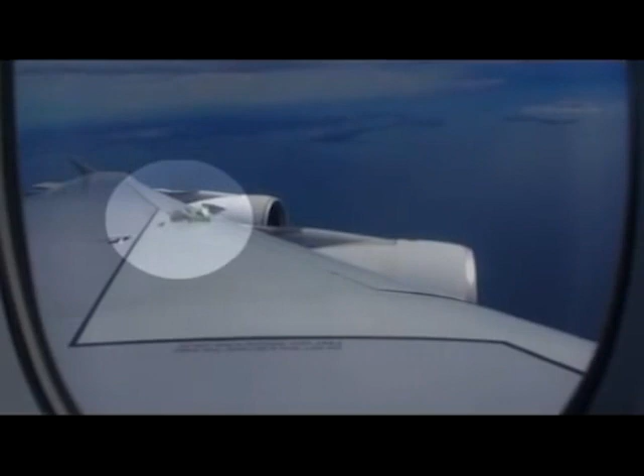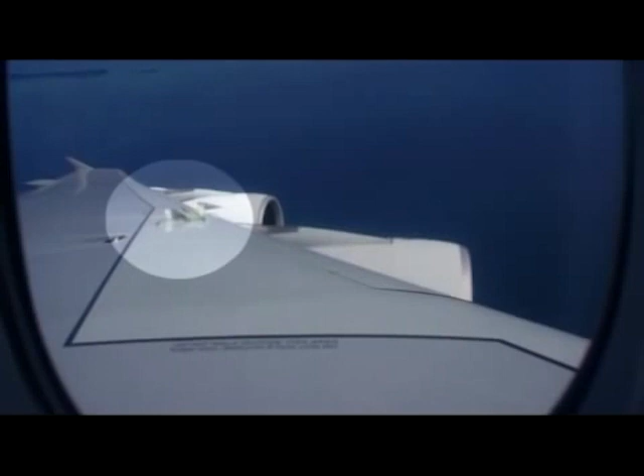Apologies. I'm sure you are aware we have a technical issue with our number 2 engine. We have dealt with the situation at the moment. The aircraft is secure at this stage. We're going to have to hold for some time whilst we lighten our load by dumping some fuel and a number of checklists we have to perform. But as I'm sure you are aware, we're not proceeding to Sydney at this stage. We're making our left turn now to track back towards Singapore. As we progress with this, we'll keep you informed. At this stage, everything is secure. The aircraft is flying safely, and we'll get back to you very shortly with further information. Thank you for your patience.

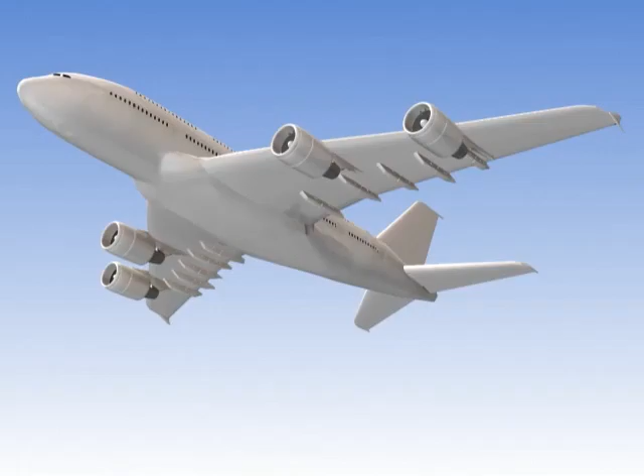On November 4th, 2010, Qantas Flight 32, an Airbus 380 with 440 passengers, 5 flight crew, and 24 cabin crew, departed Changi Airport, Singapore, on a scheduled flight to Sydney, Australia. About 4 minutes after takeoff, while the aircraft was climbing through 7,000 feet over Batam Island, Indonesia, the flight crew heard 2 bangs. A number of warnings and cautions were displayed on the Electronic Centralized Aircraft Monitor, or ECAM.

Initially, the ECAM displayed a message warning of turbine overheat in the number 2 engine. The crew was cleared by ATC to conduct a holding pattern to the east of Changi Airport. While in the holding pattern, the flight crew worked through the procedures relevant to the messages displayed by the ECAM. The aircraft had sustained significant impact damage to the left wing by fragments and debris from the uncontained engine rotor failure, and fuel was leaking from the damaged left wing fuel tanks.

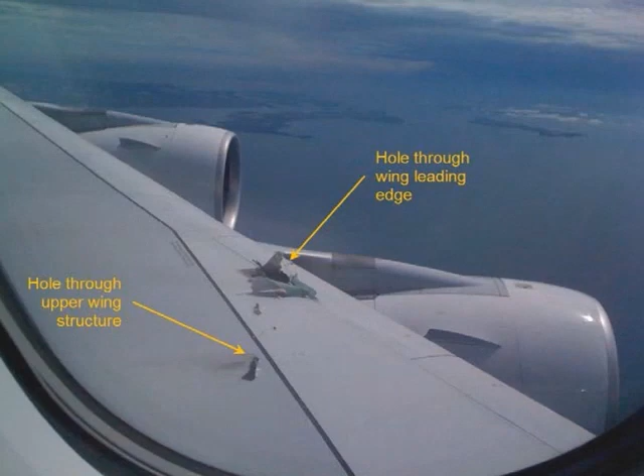The flight crew reported that during their assessment of subsequent multiple fuel system ECAM messages, they elected not to initiate further fuel transfer as they were unsure of the integrity of the fuel system. In addition, the flight crew could not jettison fuel due to damage to the fuel management system. After completing the ECAM procedures, performing some aircraft controllability checks, and determining the landing distance requirements, the flight crew landed the aircraft safely at Changi Airport.

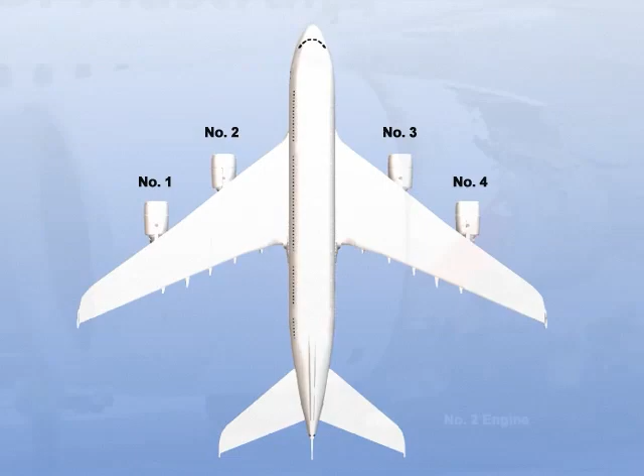After landing, fuel continued to leak from the left wing tank. The risk associated with fuel leakage near hot brakes was minimized by airport emergency services, who applied large quantities of water and foam below the left wing while the aircraft's engines were shut down. The number 1 outer left engine continued to run following the normal shutdown procedure. Because of the still running engine and leaking fuel on the left side, the passengers were disembarked via a set of stairs on the right side of the aircraft. The disembarkation was completed about 1 hour after the aircraft landed.

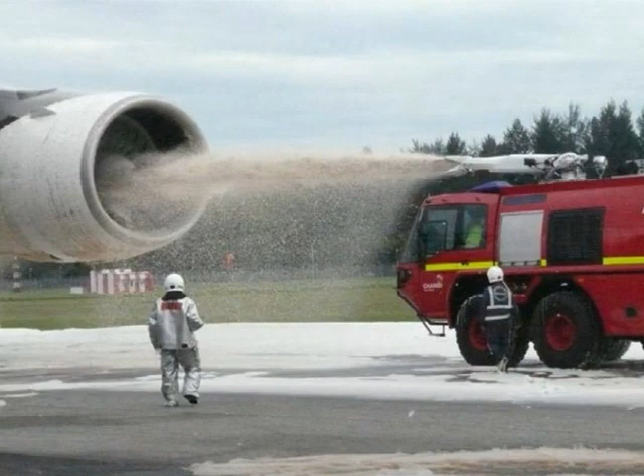The number 1 engine was finally shut down about 3 hours after the aircraft landed by pumping firefighting foam directly into the engine inlet. There were no reported injuries to the crew or passengers, and there were no confirmed injuries to persons on Batam Island.

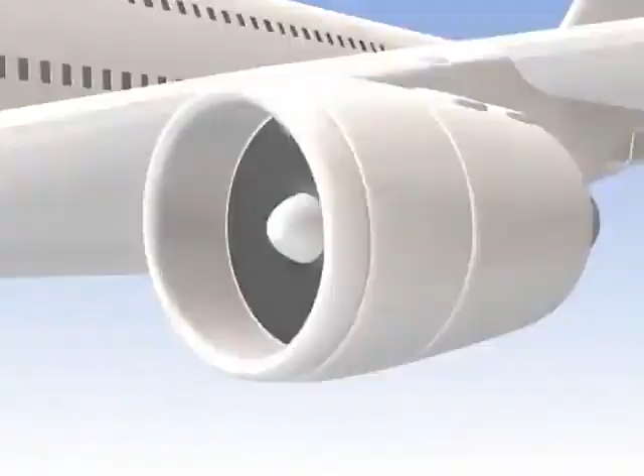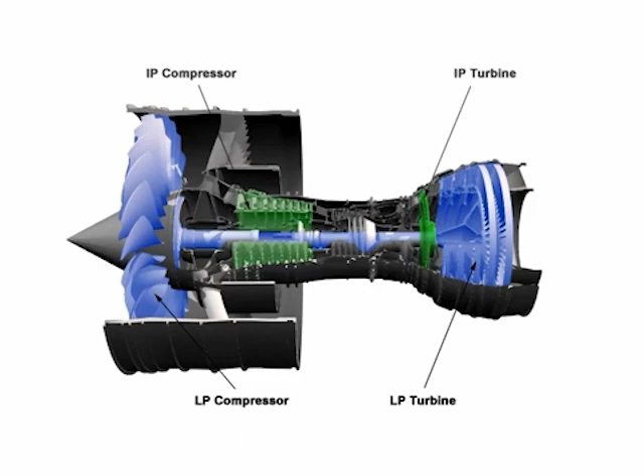The Trent 900 is a 3-shaft high bypass ratio turbofan engine with variants ranging in maximum thrust from 75,000 pounds to 84,000 pounds. The 3 primary rotating assemblies in the Trent 900 are, first, a low-pressure or LP compressor connected by a shaft to a 5-stage LP turbine; second, an intermediate pressure or IP compressor connected by a shaft to a single-stage IP turbine; and third, a high-pressure or HP compressor driven by a single-stage HP turbine. Each rotating assembly is supported by bearings at the front and rear of each shaft.

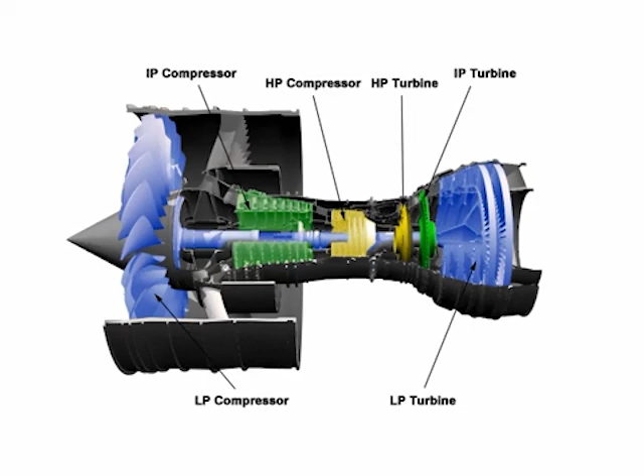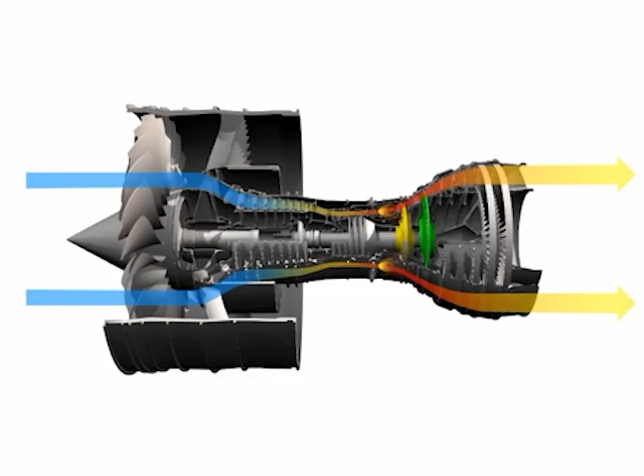The number 2 engine on Flight 32 was a Rolls-Royce Trent 972-84 variant. The engine's rated maximum takeoff thrust was approximately 76,800 pounds. Spaces within the IP turbine module are supplied with compressed air from various engine compression stages to provide cooling or sealing functions. The Trent 900 is of modular construction and includes a separate module for the IP turbine. The HP-IP bearing support structure provides radial and axial location support for the HP and IP bearings. The bearings are located in a hub structure that encloses an oil-fed bearing chamber.

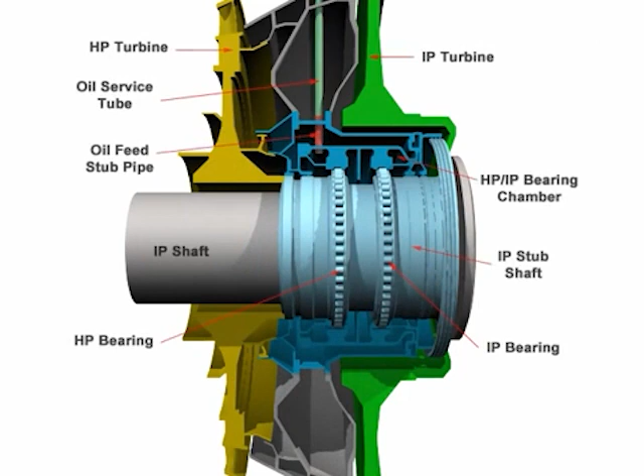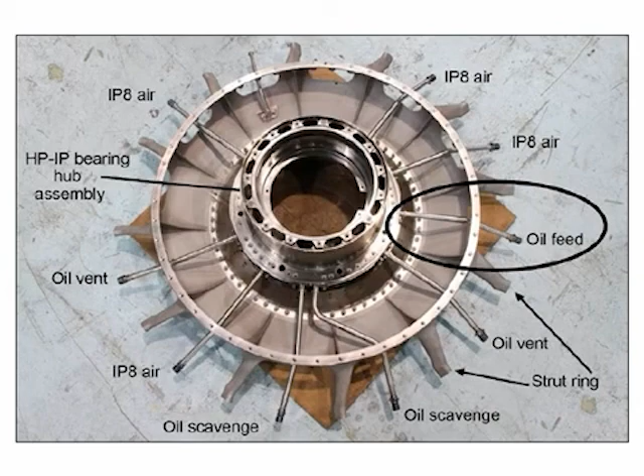That hub is connected to the IP turbine case through a strutted ring structure that has a front and rear panel. The support struts pass through the IP turbine nozzle guide vanes. The oil feed, scavenge, and vent pipes pass through clearance holes in the outer hub, then through the buffer space and are secured to the inner hub by an interference fit. An integral filter in the oil feed stub pipe was included, with the intent of preventing oil contaminants entering the HP-IP bearings. To accommodate the filter in the oil feed stub pipe, the inner hub end of that pipe has an enlarged inside diameter. A number of oil feed stub pipes within the HP-IP hub assembly were manufactured with thin wall sections that did not conform to design specifications.

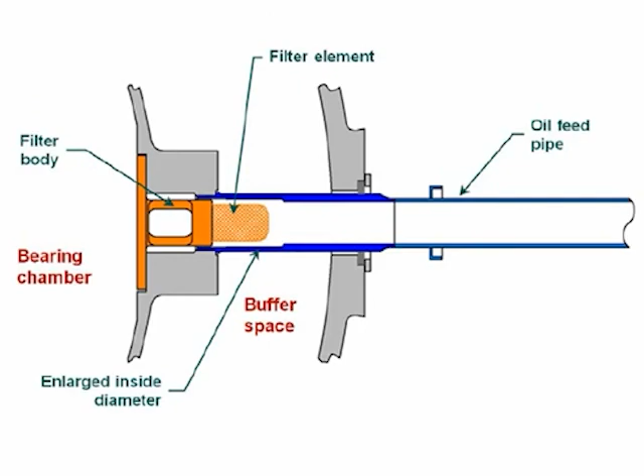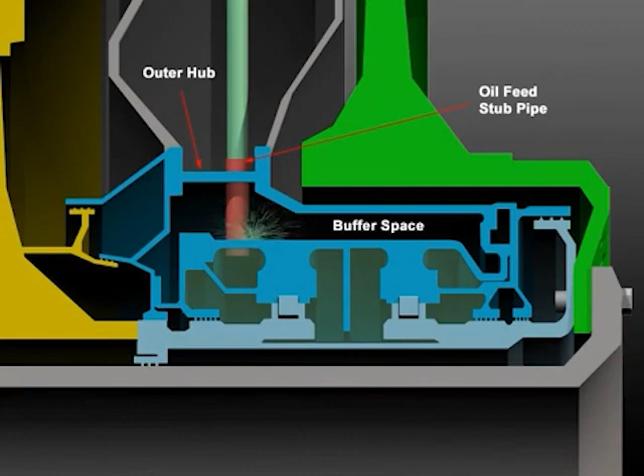The non-conforming oil feed stub pipe on the number 2 engine developed a fatigue crack, which led to an internal oil fire. The leak was at a low rate, but at a pressure that likely resulted in an atomized oil spray. The temperature in the buffer space was reported by the manufacturer to be in the range of 365 to 375 degrees C. The synthetic oils used in the engine had auto-ignition temperatures as low as 280 degrees C. A comparison of these temperatures indicates the potential for auto-ignition, and given that there were no other ignition sources identified, it was likely the leaking oil auto-ignited when it atomized on entry into the buffer space and resulted in an internal oil fire.

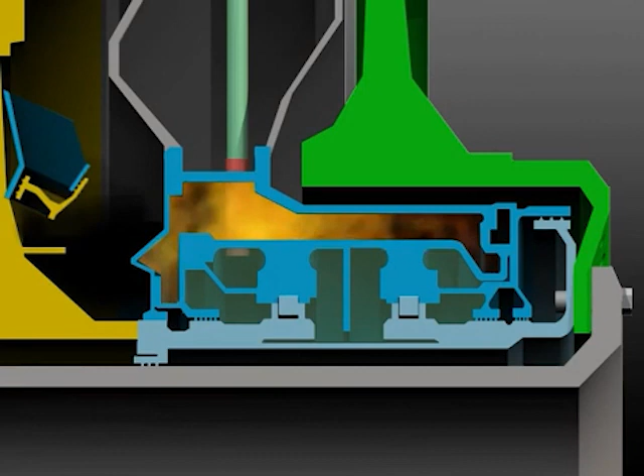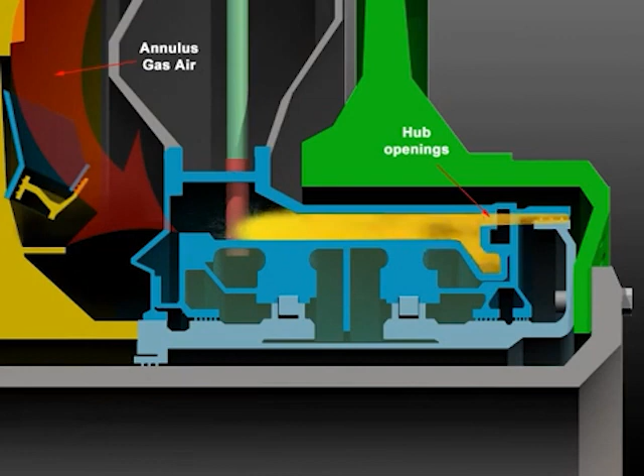About 10 seconds before the engine failure, the fire breached the front face of the HP-IP bearing chamber buffer space and impinged directly on the HP-IP triple seals. The intense heating distorted the seals, causing them to come into contact with each other. The design of the engine was such that the pressure within the buffer space and behind the IP turbine was lower than the hot annulus gas airstream exiting the HP turbine. This meant that when the triple seals were breached, those hot gases were drawn into the space behind the HP turbine disc. Openings in the hub at the rear of the buffer space directed intense radiant heat and flame onto the triple seal at the rear of the HP-IP bearing chamber.